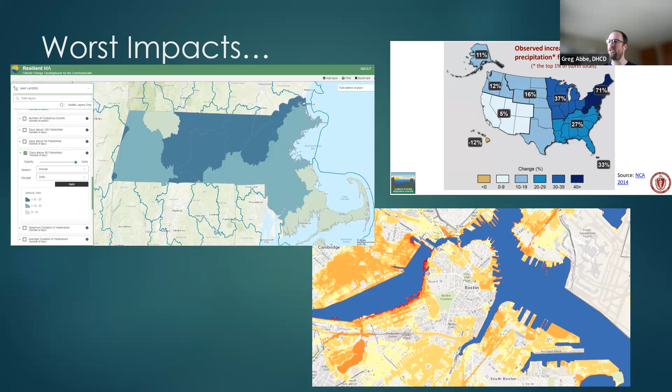So we've got more heat to deal with. We've got increased amounts of rainfall that we have to deal with, and we've got sea level rise and storm surge that we have to deal with. And all of these are contributed to and accelerated by the greenhouse effect. So that's why we're trying to reduce greenhouse gas emissions.

So let's talk a little bit about Massachusetts goals from a very high level. I promise I won't go into policy stuff too much here, but there are some important laws that are on the books. Climate Bill S9, this came out just a couple of years ago, and it set the state's greenhouse gas limits at net zero by 2050, meaning we want to reduce it as much as possible, and then anything that can't be reduced, offset it with some type of negative emissions, which could be planting more trees, it could be carbon sequestration technology, which is really cutting edge and not quite ready yet.

But what this bill also did was it set incremental goals for the Commonwealth in 2030, 35, 40, 45, and then 50. So it's not just net zero by 2050, we've got to keep going.

And then it seems someone has annotated over my greenhouse gas emissions there. I wonder if I can. Ooh, that's fun. Well, we'll keep going.

There we go. Thanks. Climate Bill H5060. This said a few different things. It said we need to bring more renewable power onto the grid, and in particular offshore windmills, which is a pretty exciting thing off of the South Coast. We're looking at fewer fossil fuels, and in particular, the Mass Save programs, which many of you may have heard of before. They will be required to start winding down their support of fossil fuel fired equipment.

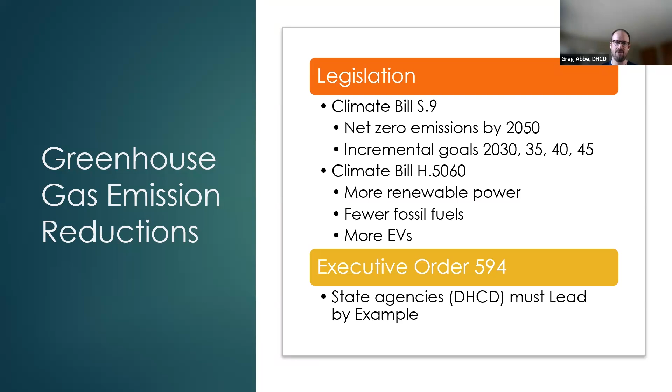And on the executive branch side, Executive Order 594 said that state agencies like DHCD have to lead by example. So we have to do what we can to help reduce greenhouse gas emissions using the authorities that our agency has. So to boil all of this down, reducing greenhouse gas emissions isn't just a good thing to do for the future, it's also mandatory per state law and all these other things.

But let's talk now about resiliency. What is resiliency? Essentially, it's how do we adapt to a more uncertain weather future, that extreme heat, rainfall. What do we do to prepare for those types of weather hazards? What the state's done is, and we've got another acronym here for you, we love acronyms, the SHMCAP initiative, which is the State Hazard Mitigation and Climate Adaptation Plan. What it did was it told state agencies, again, like DHCD, to identify resiliency vulnerabilities, places that will be impacted by extreme rain, heat, sea level rise, storm surge, and then make plans to try to improve the resiliency of those areas or facilities. And that'll be important in just a moment.

So what does DHCD have to do with all of this? Well, DHCD, and particularly the Division of Public Housing, which is the division in which I work, we help housing authorities all across Massachusetts improve their facilities. We help them with funding. We help them with technical guidance. We've got engineers and architects on staff that review all types of improvements to buildings and sites and developments. And so we try and encourage housing authorities to reduce their greenhouse gas emissions, make things more resilient, and improve the indoor air quality of buildings.

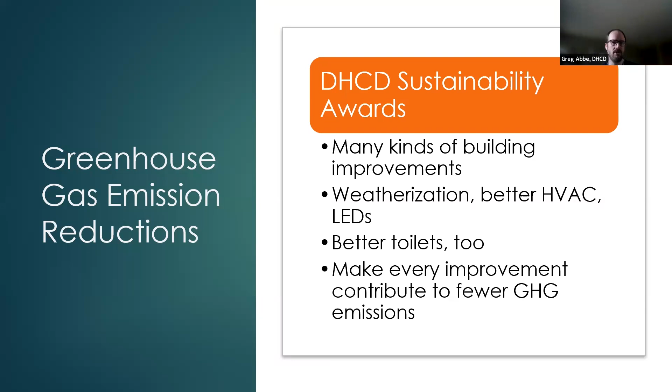And ultimately, what we're trying to accomplish is we want to try and have all of the routine things that housing authorities do, if it's replacing a roof, replacing siding, replacing a kitchen, the cabinets, the appliances, you name it, we want to try and have each of those be a little bit better than it might have without our intervention, so that every project reduces greenhouse gas emissions in one way or another.

On the resiliency front, we also have awards that can help housing authorities make their developments more resilient. And in particular, we completed what we call the CHARM study. Again, another acronym. Love the acronyms. CHARM is the Climate Hazard Adaptation and Resiliency Master Plan. There's no test at the end. You don't need to memorize that.

But the important thing is we looked at every single state-aided housing authority development, and we said, how vulnerable is this development to sea level rise and storm surge, rainfall flooding, and extreme heat over the next, say, 30 to 40 years? And we went through all those different developments. We updated all of our systems that housing authorities use so that they're able to see, hey, I'm working on this particular development and it's vulnerable to extreme heat. So I need to make sure that the particular projects that I'm working on take that into account.

Very easy example. Let's say you need to replace a roof and you realize that from this study and the updates we've made, this development is vulnerable to extreme heat. We want you to make the roof a lighter color so that it reflects sunlight off the roof, keeps that building cooler, keeps it more comfortable for everybody inside, and it uses less energy.

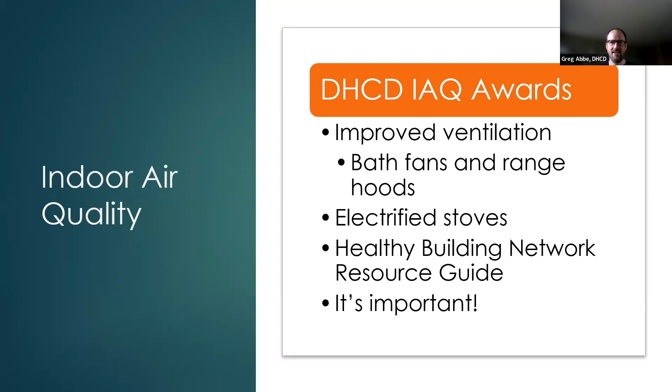There are some other opportunities to do different types of projects that are outside of DHCD. Many of you may be familiar with the Mass Save program, and particularly their income eligible arm of the program. It's often called LEAN because it works with a network of CAP agencies and the Low Income Energy Affordability Network, which is what LEAN stands for. And they make all kinds of improvements to buildings, very similar to what I was describing before: weatherization, heating and cooling system improvements, and so on, typically at no cost to those who qualify. And so that can be a huge benefit.

There's also a brand new program that they announced maybe 2 weeks ago that's called the Deep Energy Retrofit Program. And in that, there are some very compelling incentives related to large projects that do a ton of work all at once. And particularly, they're looking for an energy savings of 40% or greater for just one big project.

So it's a high bar, but if it can be achieved, there's a lot of incentive backing that up. So that's pretty exciting too. And DOER, the Department of Energy Resources, recently received some funding from the Inflation Reduction Act at the federal level. It made its way down, and they are putting together an initiative that will also help property owners reduce their greenhouse gas emissions by making big renovations.

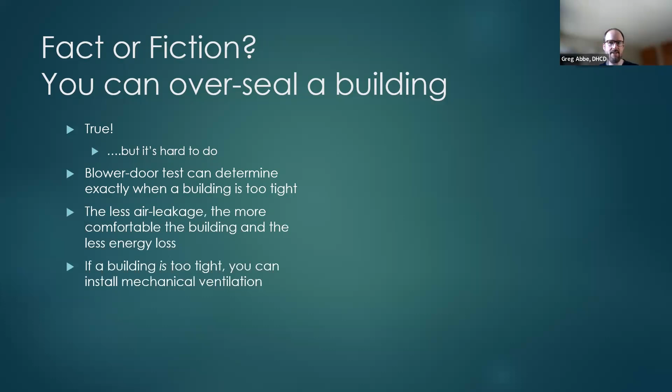But in a lot of high performance buildings these days, a very tight building is paired with mechanical ventilation. So you have a very tight building, and then you install an intentional ventilation system that pulls fresh air in from outside and exhausts indoor air directly outside. And it runs it through a heat exchanger that I think in most cases are 95% efficient. They're very, very good. And so the occupants have fresh air all the time.

And the building is really, really tight, thus reducing energy loss out of the building, and it tends to be much more comfortable. It's difficult to put a dollar value on what comfortable is, but when you feel it, it's a pretty great thing. So it's true that you can overseal a building. Oversealing is not a good thing unless you pair it with ventilation.

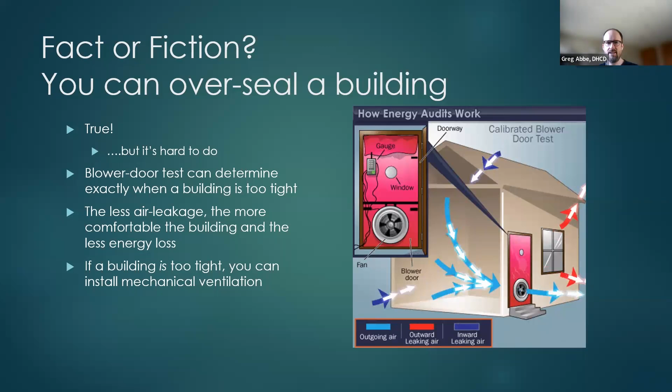Another myth: heat pumps are junk. Many of you have probably heard of heat pumps before. Some of the common myths that I've heard is that the air that they put out, it's not comfortable, or when it's really cold outside, heat pumps don't work, or they don't really save any energy. These are some of the common things that I've heard here and there.

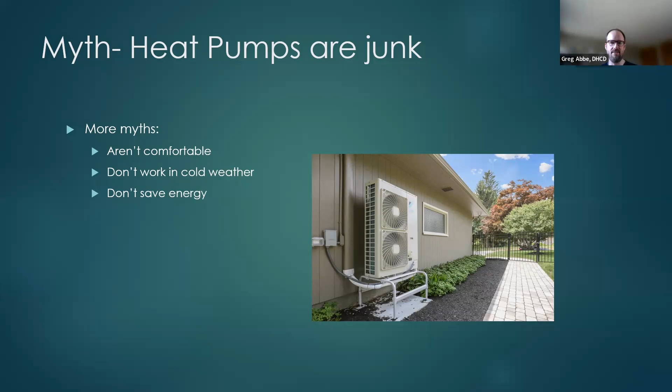Heat pumps these days can work even when it's negative 15 degrees outside. I've actually got one on the wall just over here. And on that really, really cold day a few months ago, it was still able to make some heat. It was cooler. I mean, it was probably 68 in here, but it wasn't cold. I just had to put on another layer.

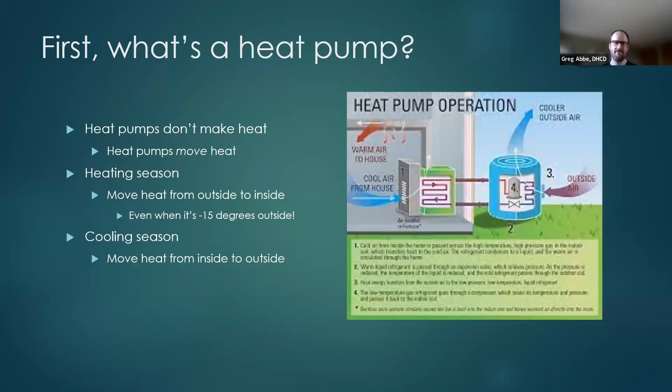Those myths that I mentioned are not true. Heat pumps can be really, really great. And they're really great for a few reasons. The first, and this is the reason they're so popular right now, is that as the electric grid gets cleaner, heat pumps and really anything that's electric and attached to the grid also gets cleaner.

So when you burn a gallon of oil, that emits the greenhouse gas emissions that it emits. When you run a heat pump attached to the electric grid, as the grid gets cleaner, you put more wind turbines on it or solar panels like you see on the right, then the emissions from the energy being consumed are going down over time. So it's a really good thing from a greenhouse gas emission perspective.

It can provide heat these days, like I said, when it's negative 15 degrees outside in many cases. They provide air conditioning, which is increasingly important as we're getting warmer and warmer, like we saw on that slide earlier. COP stands for the coefficient of performance. It's basically how efficiently heat pumps operate.

For comparison, a gas furnace is about 0.95, or 95% efficient. That means that for every unit of fuel that it puts in, 95% of that goes into the building, and you lose about 5% out the chimney. Those are the most efficient gas furnaces these days.

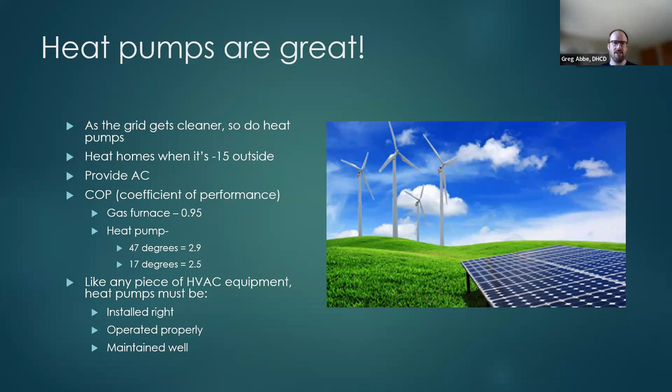And on the operations side, I'm happy to share this afterwards, but there's a really great heat pump guide that Efficiency Maine put together. This is an organization up in Maine that encourages folks to use heat pumps, and they provide a lot of incentives. They're kind of like Mass Save. And this heat pump guide talks about very effective operation practices that anyone with a heat pump can use.

So for example, number 2, set it and forget it in the winter. I think a lot of us, myself included, are accustomed to turning the temperature down a few degrees when you leave the house or go to sleep, to save yourself some energy. With heat pumps, it actually is more efficient if you just set the temperature to something that's comfortable and then don't touch it again.

Heat pumps have a motor that doesn't just go off and on. It can go off, it can be 10% on, 30% on, 50%, 70%. So it's variable, and it's much more efficient if it's just having to maintain a certain temperature by operating at maybe 20% capacity, as opposed to you shut the whole thing off and you have to heat the whole house up again at 100% capacity.

Similarly, set for comfort regardless of your usual boiler or furnace setting. Something I'm very accustomed to is, if you've got a boiler, the recommended temperature from the Department of Energy, I think, is 68 degrees in the winter. For some heat pumps, that might feel comfortable, but it might not in other cases, because heat pumps just heat differently than boilers do. So it could be that for you, 73 is more comfortable. And if that's the case, you set your heat pump to 73 degrees and you let it go.

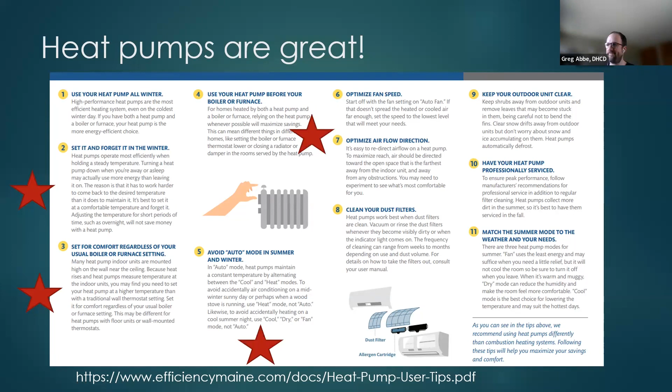Let's talk about another myth. There's nothing people can do about high utility costs. I'm sure you noticed this past winter, electric bills and gas bills went through the roof. They went through the roof for a whole host of different reasons, but something I heard from a lot of different folks was, well, that's just the utility companies and there's nothing I can do about it. I just have to deal with it, essentially. That isn't completely true. Many folks are able to do all kinds of different things related to energy costs.

If you pay your own bills, if you live in a community where you are responsible for paying bills, the utilities have discount rates for electric and gas. I forget exactly what the discount is, but I think it's over 10% of the particular rate. And so each utility has a phone number that you can call, get yourself signed up for those rates.

For housing authorities, generally, you can do sustainability related work through either DHCD or Mass Save Income Eligible program. Again, make your building more efficient, make it better insulated, more airtight, but not too much. And that will all reduce utility consumption, reducing costs. You can also do on-site solar. This is something that was a little out of reach for a lot of housing authorities and other property owners in the past, but is not as much anymore.